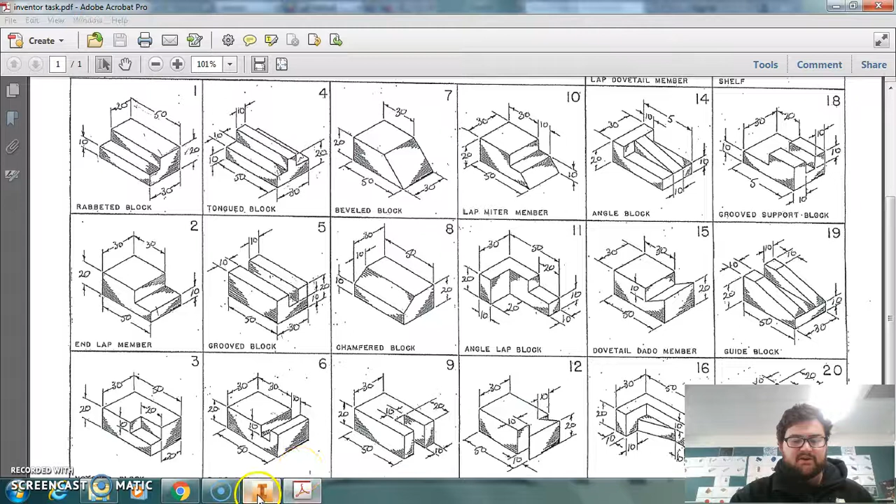So whenever you look at these drawings, make sure you forward plan in your head how you're going to do it. If you don't have an understanding of how you're going to do it, it's going to be really hard when you open up Inventor and start trying to draw these, okay? So, let's have a go. So open up Inventor, and then I'm going to draw a standing up L. So start 2D sketch, then select planes like that.

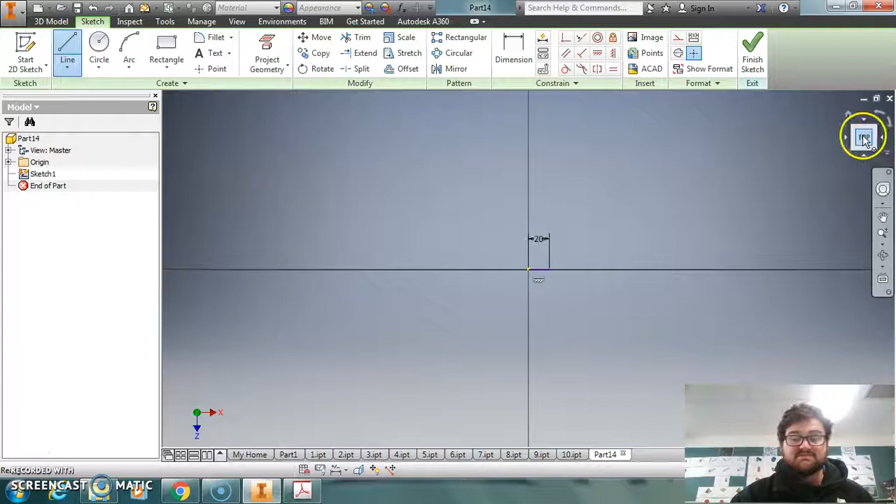Alright, line. So have the L standing up like a normal L shape. Okay, so 20 millimeters. Oh, I've already made a mistake. That wasn't meant to be 20 millimeters. That was meant to be 30 millimeters. But at least now I'll be able to show you how to redo that. So if I right click and go OK, I can double click on that measurement and actually change that to 30 millimeters. Okay, so there we go. We've now got the correct line there.

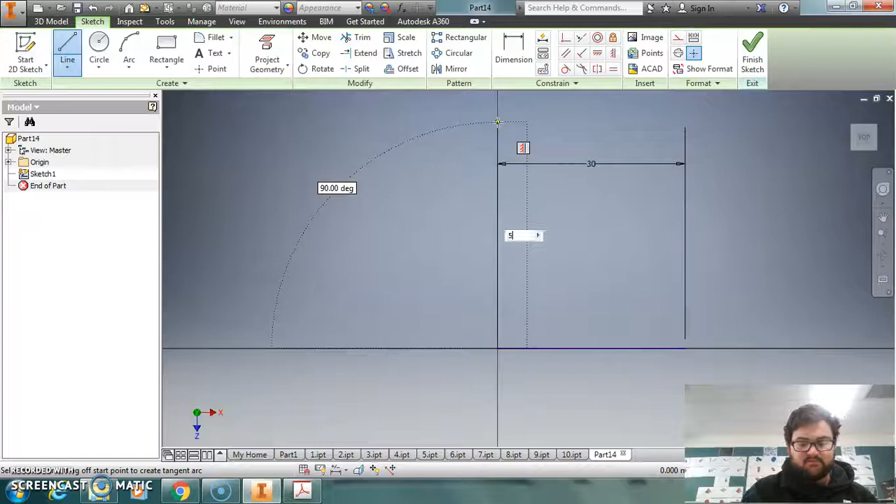So now we're going to go up, select our line tool again, and we're going to go up 50 millimeters. And remember, if it goes off the page, you want to be able to see what you're doing properly, so clicking on our movement cube there. Okay, and then we're going across 10. And then we're going to go down to 40. So remember, we've got a 10 millimeter measurement down there at the bottom of our drawing that we're copying. So we know 50 take 10 is 40. So 40 millimeters there.

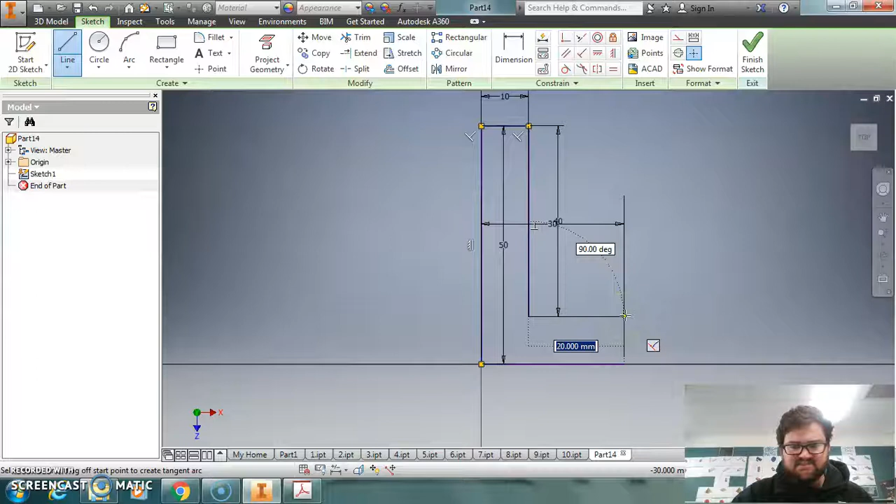And then going across until this line's up there. So that's snapping to that point there, so I know that's lined up with this line down the bottom. So there's our basic L shape, standing up there. Okay. So now we're going to extrude that. 3D model, extrude. And we're going to extrude that 20 millimeters. Alright, so then zooming out, we've got our L shape.

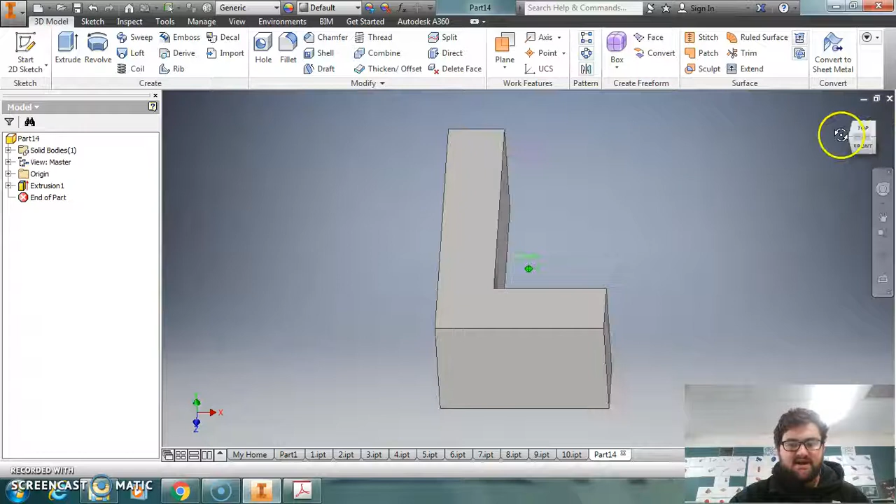So now on the long axis of our L here, not on the short one, we're going to want to sketch on there, okay? So if I click on there and make a sketch, then we're cutting out a rectangle from the end, so I can use the rectangle tool. Remember, when the circle goes green, that means you've selected a corner, so then I can open that up like that. And now I want this to be 10 millimeters by 20 millimeters, okay? The width of our drawing is 20 millimeters, and from the bottom it says 10.

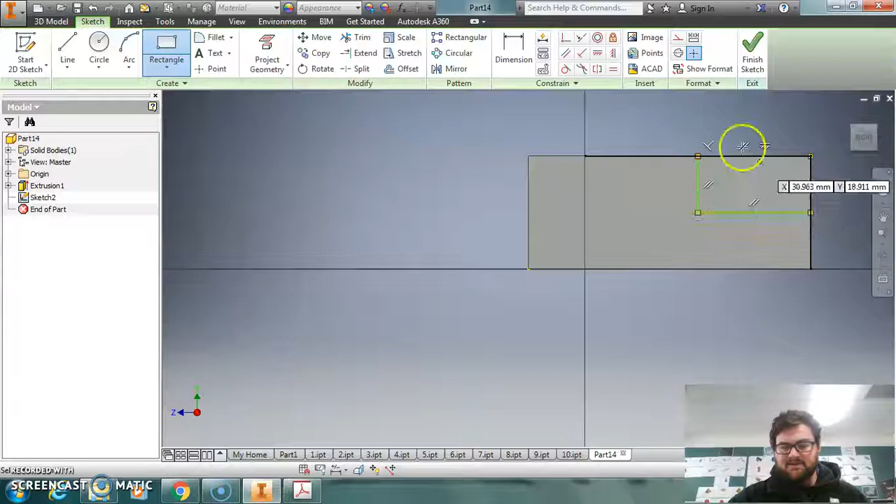And I think I've actually got that. That's actually snapped straight to the right point. I don't know why that's worked, but it has. So if I'm very careful, I can just click, and that's already perfect, which is nice. I might actually redo that, just to show you guys. So if I go rectangle, oh, it almost did it again. So remember, going 20, tab, 10, and pressing enter, and that'll give you the right one.

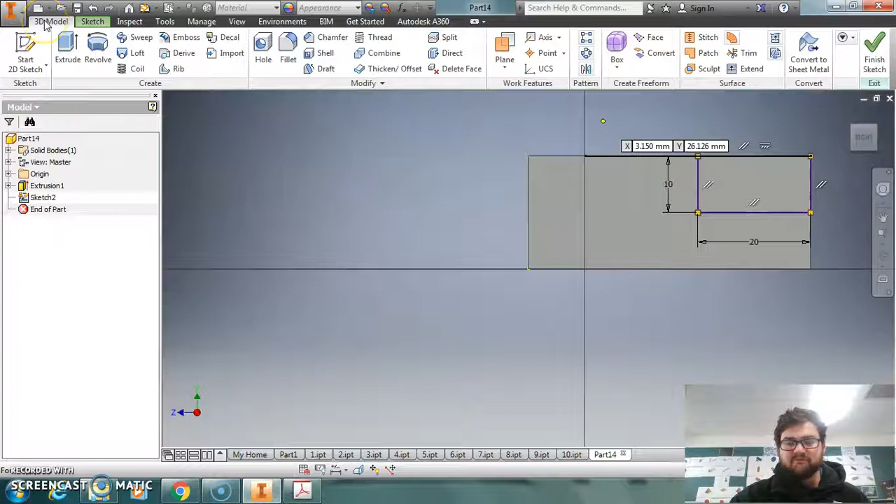Okay, so 3D model, extrude, and we want to cut. So remember the two different ways. You can either click here, and then it'll make it cut, or over there, and it'll make it cut. Now, as you can see, 20 millimeters is actually too far. You can actually also cut using the arrow, which is very inaccurate, but there is one way to do it.

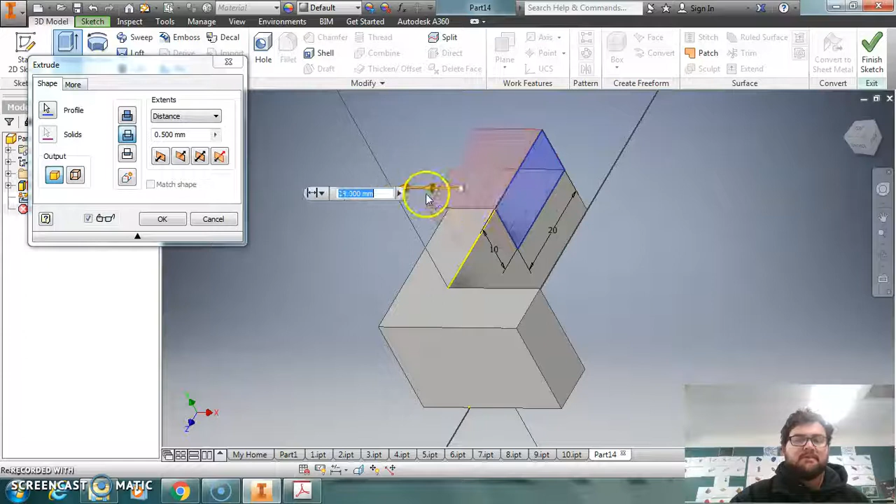So if you just want to cut all the way through something and you've set it to 0.5 millimeters, you just drag it all the way through and go OK, and that'll cut it for you. So now having a look there, that looks pretty bang on. I'm pretty happy with that. And then saving that, and make sure we're saving it as the right one. So 11, saving that in the right folder, all done.